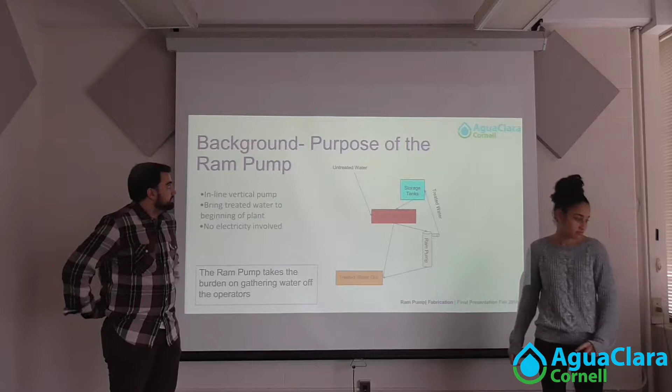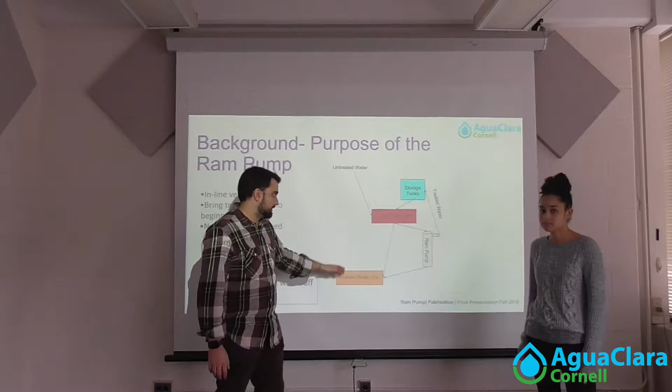So the first thing is just a nice little background of what a ram pump is. It's just a nice little crude drawing, not really to scale at all. But basically we get the water that goes into the plant, it gets treated, and the water gets out, but also in line with the water coming out is our ram pump, so we can push the treated water back up to the storage tanks and be able to use it for plumbing and help with the coagulants and stuff, because it's just clean water that can be used.

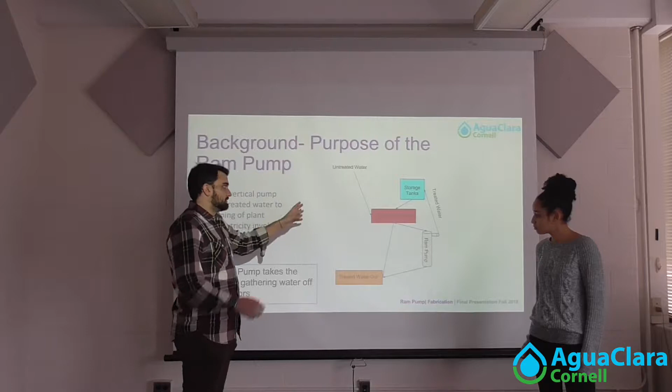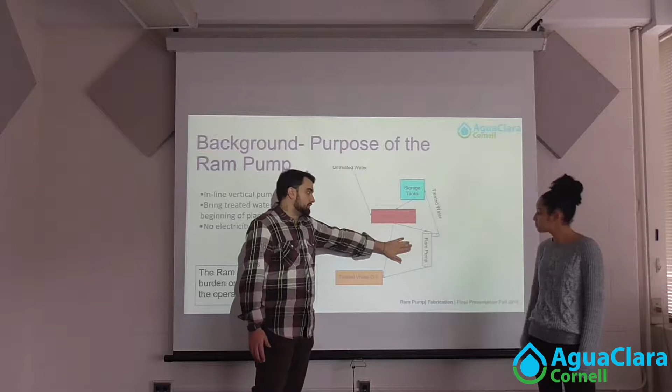And this is helpful because it takes the burden off of some workers, because you don't have to carry it, as we use gravity. This is definitely lower than this is, so someone would have to carry the water up. So we use a ram pump with a spring with no electricity, which is on par with the rest of the plant, to bring the water back up to the top.

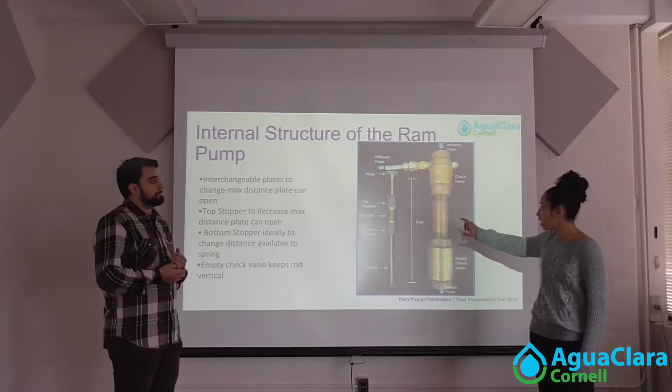So this is what the Ram Pump itself actually looks like. It's composed of these two check valves that are connected by this middle brass connector. And this top check valve also has another valve out of it, which is where the effluent of the pump goes. And the influent comes in right through the top and exits through here when it's not being pumped.

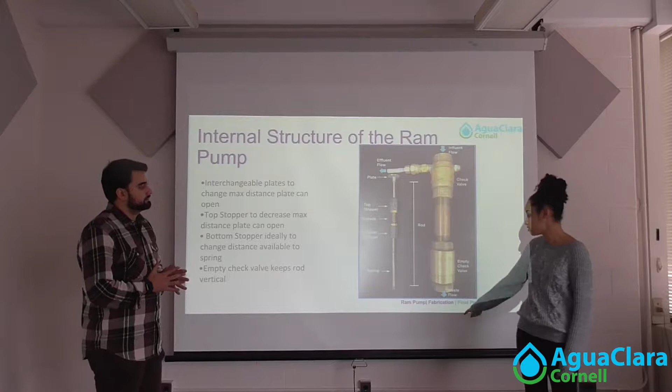And then on the inside is this rod, which has a plate at the top, and then these two stoppers which adjust different dimensions. And then a spring is put on this bottom part, and the bottom of the spring is supported by the inside of this bottom check valve.

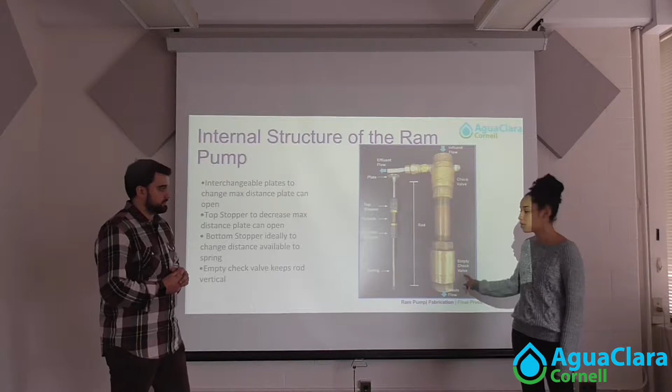So basically how the Ram Pump works is the plate is open, the valve is open, and water is coming in through the valve, and that water force eventually gets high enough to close the plate, as in it becomes greater than the spring force keeping the plate open.

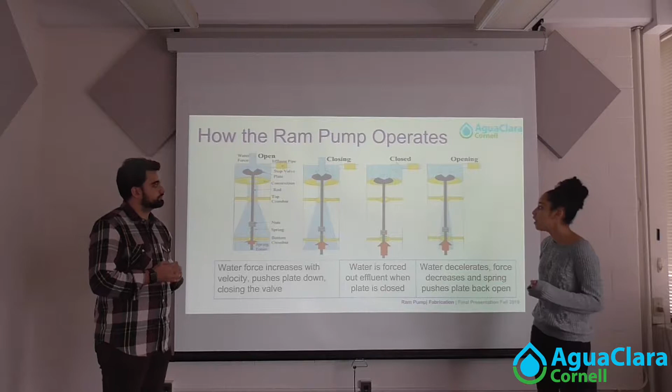And once that happens, there's a big spike in pressure, at which point water begins to exit through the effluent and is then pumped up instead of going through the valve. And as that's happening, the pressure is then decreasing until it gets to a point where it is no longer greater than the spring force and the plate can reopen.

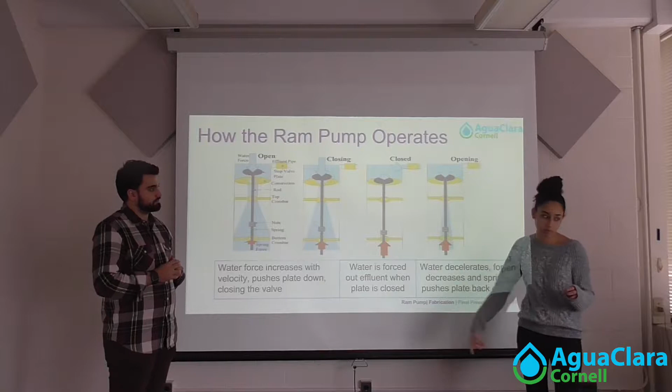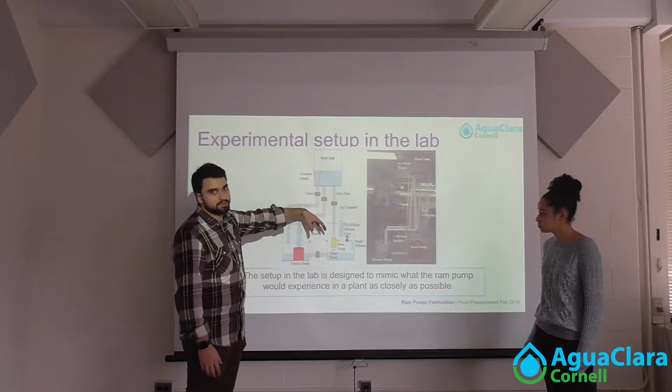So in the lab, we have a nice little mimic of what a plant could look like. We have a nice head tank, which would serve as the gravitational potential that you would see in a plant. It's connected. We have the drive pipe down to where we connect the ram pump at the bottom, so the water can drop and use just gravity and the spring that's in there to operate.

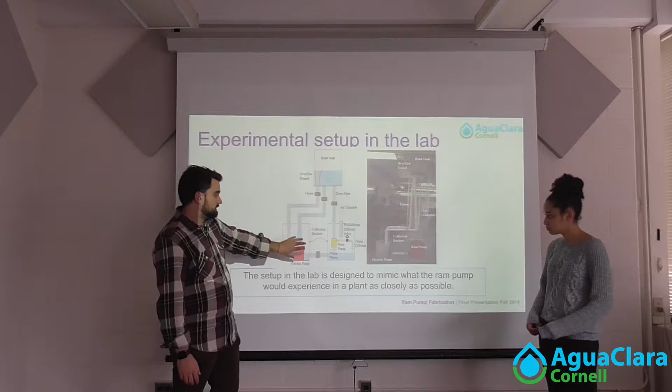On this side, we have the two collection buckets connected, so we have a sump pump so that we can push the water back up, so we can continue to test and have water moving throughout the whole plant as if water was continuously coming in.

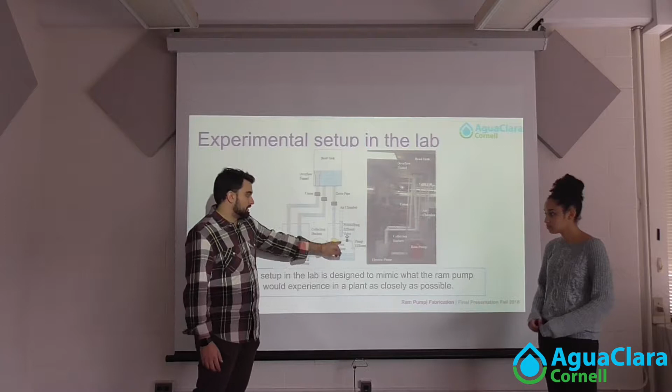And then on this side, we have an air chamber, which allows us to use the ideal gas law to see the efficiency of the pump, how high it's actually going, and then we can connect pressure sensors around the actual inside of the plate via this to try to model the behavior of what's going on inside.

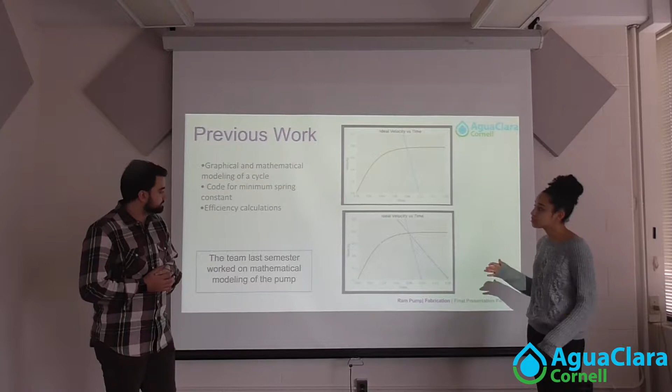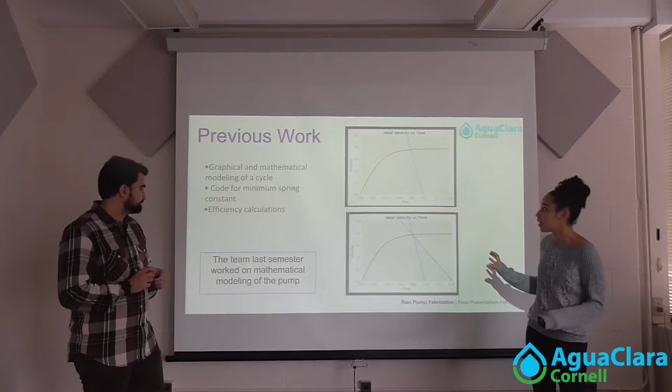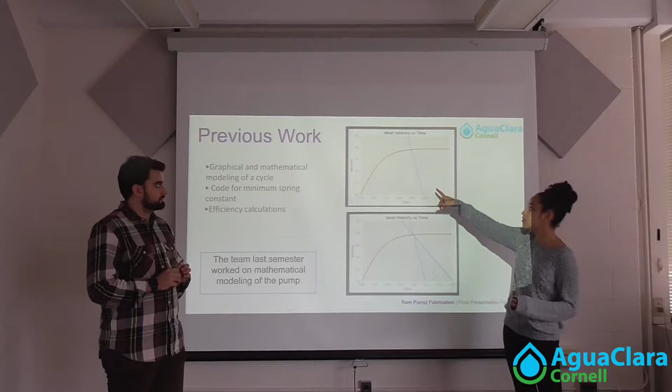So last semester, the team worked a lot on mathematical modeling and making these graphs for the ideal velocity of the water in the drive pipe. And basically the main point of this is to show that the longer the plate is closed, the more efficient the pump will be, because the red curve is the velocity of the water when the plate is open, and then this blue curve is the velocity when the plate is closed, and the area under the blue curve is the volume of water pumped.

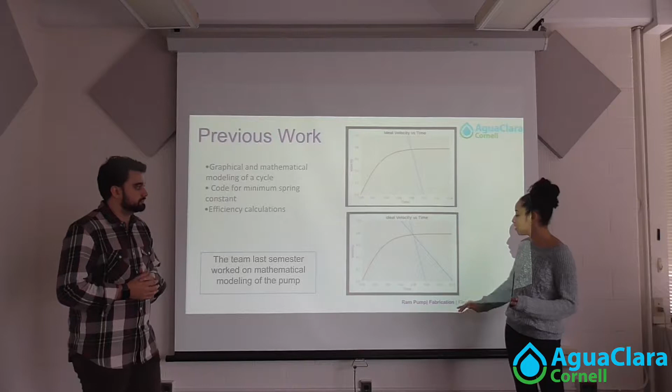So this bottom graph shows that if this blue curve could have a shallower slope, and increase the time that the plate is closed, then you will pump more water.

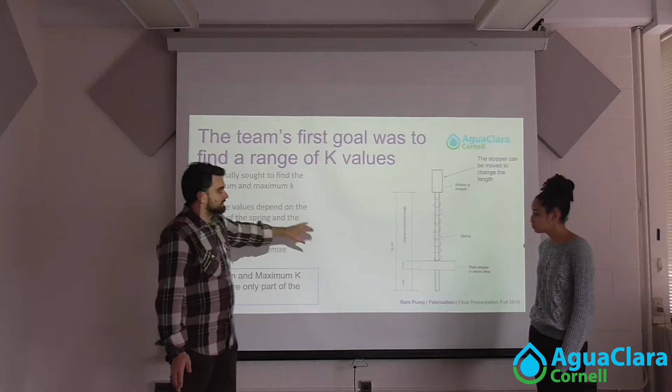So originally in the beginning of the semester, we decided we wanted to try to find a range of K values that we could always just plug in numbers specific to each plant or each situation and be able to spit out the ideal lengths or values from a minimum and maximum perspective. We soon realized that there's a lot of initial compression involved, and there's a lot more than just the K values that really optimize efficiency by the spring.

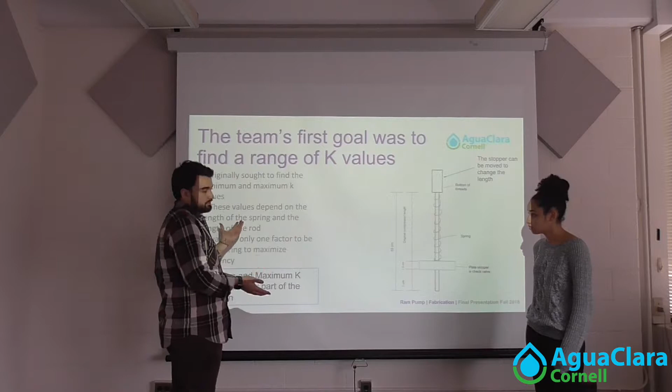So we sought to find a new explanation for why our min and max values didn't always necessarily line up when we ran tests in the lab. We came to the main conclusion that they're only part of the equation. So we moved past that.

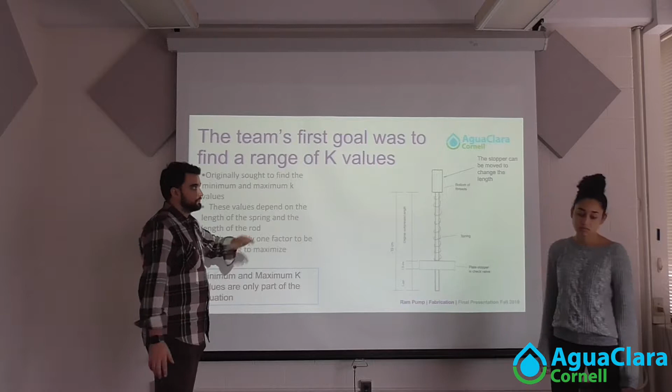So going on from that, our new approach was to look at the K value really as what it is, which is a change in force over a change in distance. The change in distance is easier to get because that's just the amount that the plate moves, which can be measured. And for the change in force, we want it to be the difference between the force that we want the plate to close at and the force that we want the plate to open at. And this gives us what we believe is our most efficient K value.

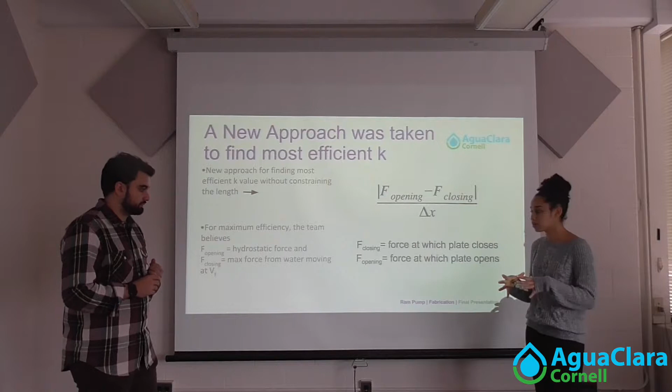As of now, we believe that the force when the plate is opening is the hydrostatic force from just the water column above the plate once the velocity has gone to zero, and the closing force is the maximum force that the moving water reaches when it gets to its final velocity.

So we began to try to solve for those two forces. We began with the force from the water, the moving water, and we constructed a few experiments to try to find that.

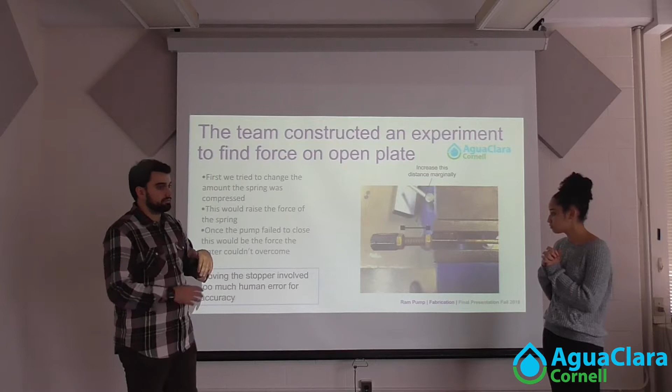The first thing that we did was we decided that we were dealing with the initial compression, which would be below the stopper for the spring, and we realized that if we changed that, we could effectively change the force of the spring. So we set out to explore changing that distance by moving the stopper down and seeing at what point the plate could no longer close. So basically, at what force from the spring was it too strong so that the water never reached that force, and we thought that we could then infer where the water got to its max force.

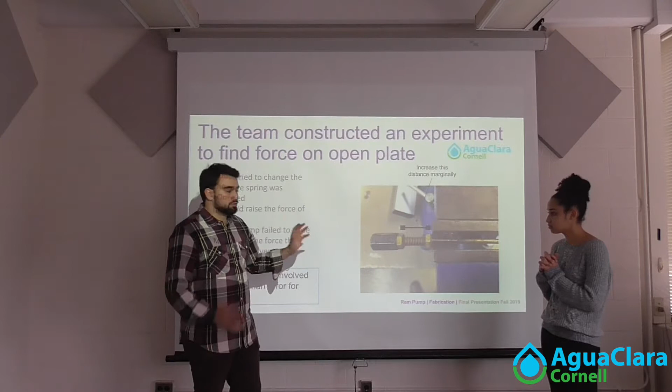But unfortunately, we're dealing with very small distances here. We are trying to increase this by like micrometers due to the fact that the plate only really closes like 1.3 centimeters total. And so it became that human error of moving this and tightening, because you have to tighten the stopper as well as the bolt here. It was just too hard to get an exact value. We could run the experiment 4 or 5 times and get vastly different values.

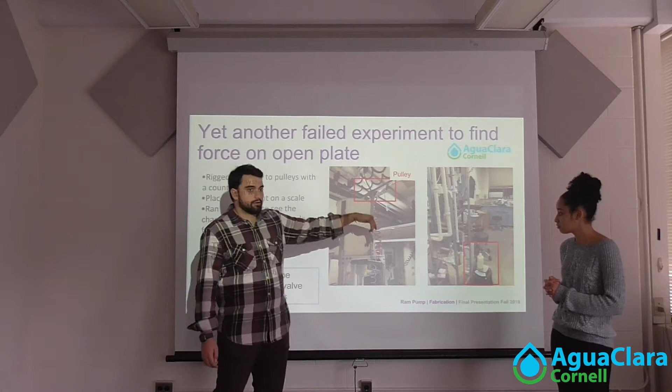So next we rigged up the lab setup for another experiment. We added some supports to add 2 pulleys so that we could run string from the actual ram pump down here, which is shown over here, up over to a counterweight so that we could more efficiently judge the opposing force on the actual plate. And our first thing was, okay, we'll just put it on a scale and then we'll run it through and we'll see how much the weight of the counterweight on the scale changes.

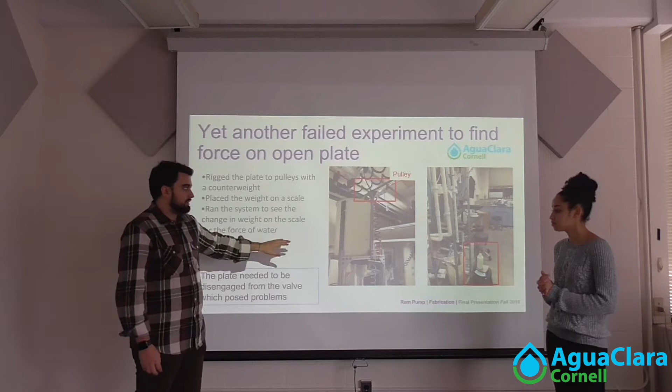The main problem with this, though, is that we realized that you really need to have the plate be disengaged from the check valve to get accurate readings, or else the change in weight is also giving you the change in tension force from the check valve. And then once again, because it's only a total of 1.3 centimeters, it became very difficult to start with the plate just barely disengaged. And then we weren't getting any accurate readings. We were getting way lower forces than seemed even possible.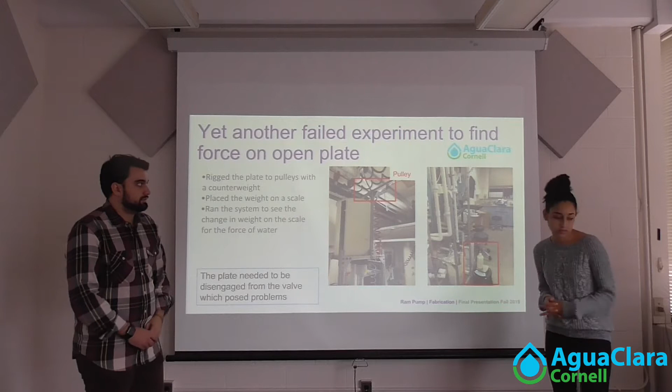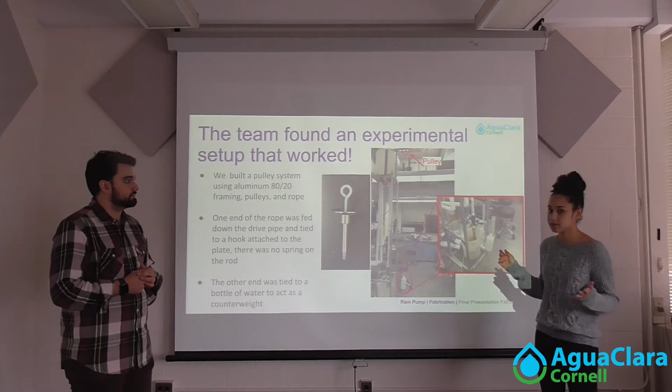So finally, we tried another experiment that actually worked. We used the same pulley system, but instead of having the weight on a scale, we just had it suspended in air. And we used this water bottle full of water as our weight. And then we ran the pump and made sure that the amount of water we had in the bottle would keep the plate open. And we emptied the bottle little by little until that was no longer the case, until the plate would close from the force of the water.

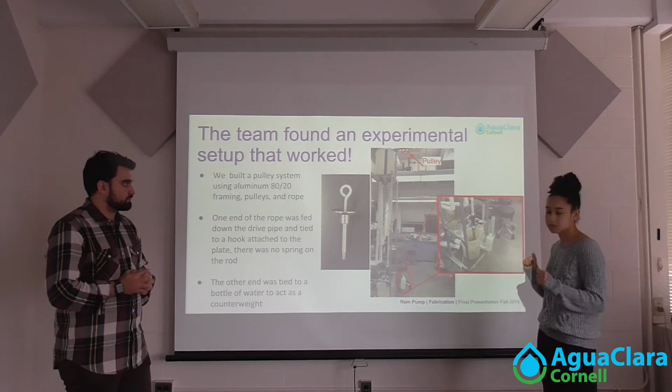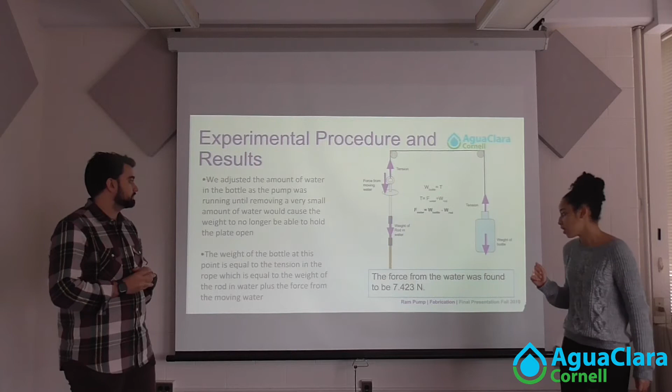And then we added water in very small increments little by little again until the plate would stay open again, and then we used that weight of the bottle to find the force from the water, because the force from the water would be the weight of the bottle minus the weight of the rod in water, since the tension is also supporting the weight of the rod. And this gave us a result of 7.423 newtons for the force from the water moving at the final velocity of our system.

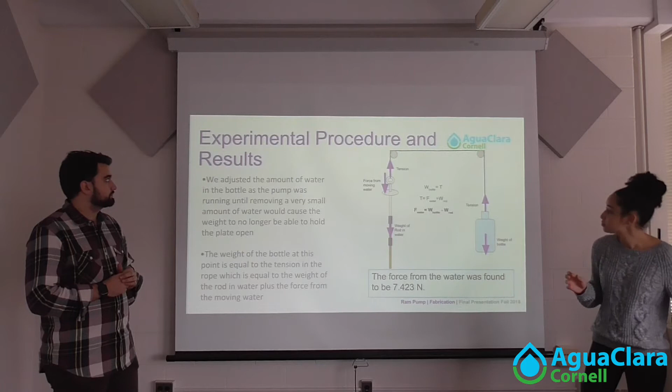So in the future, the team can look at the other aspect of our most efficient K value equation, which would be the force at which the plate opens. As of now, we suspect that this is the hydrostatic force. However, we would love for that to be confirmed by pressure sensor data, or maybe other experiments. So that is something to do in the future, and if it is not hydrostatic, figure out what it is.

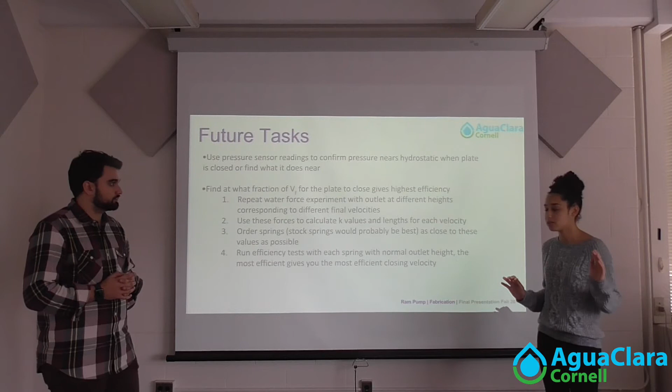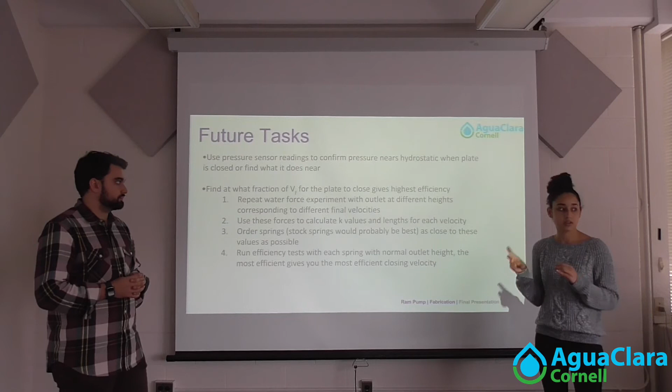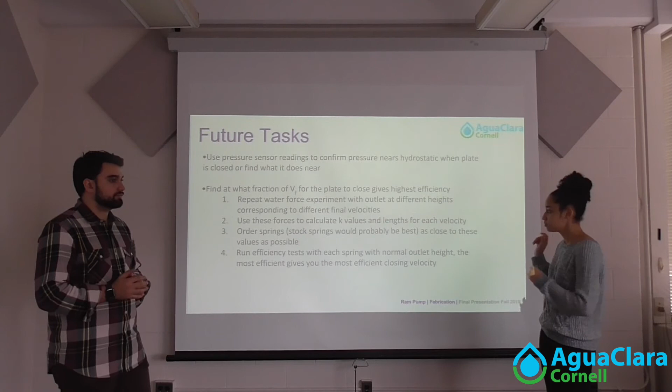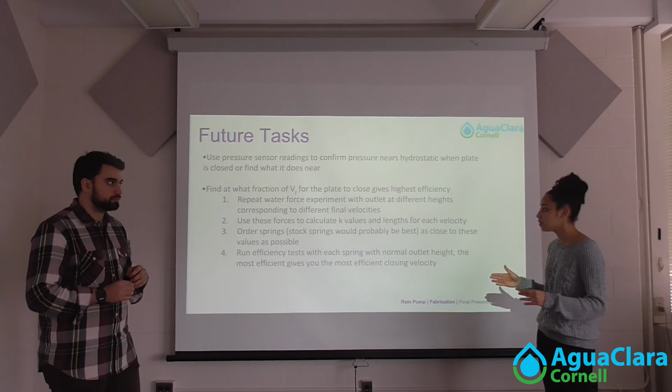So a way to do that would be to first find the force from the water with the outlet of the pump at different heights, so that you are essentially finding the force from different velocities, and then using those forces in that ideal K value equation to find the different K values for the different cutoff velocities, and then ordering springs based on that and running efficiency tests with each one to find the most efficient cutoff. And yeah, we think that that's a good direction to head in.

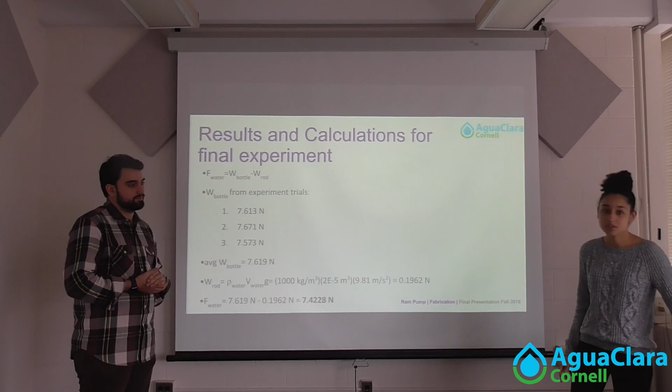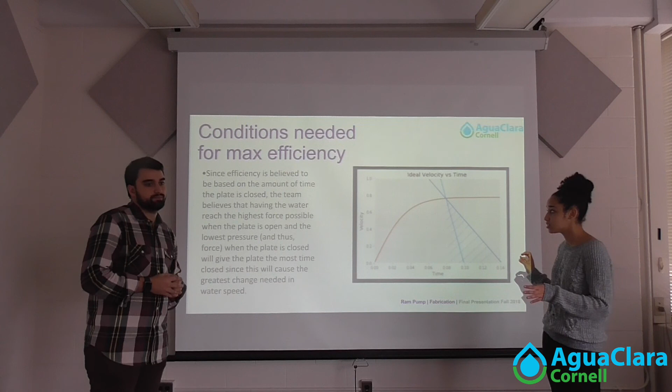So our contact information, and we do have a few appendix slides, which just detail the calculations and results from our experiment, and the conditions that we believe lead to max efficiency and why, and fabrication details on how we connected this hook to the plate for our experiment.